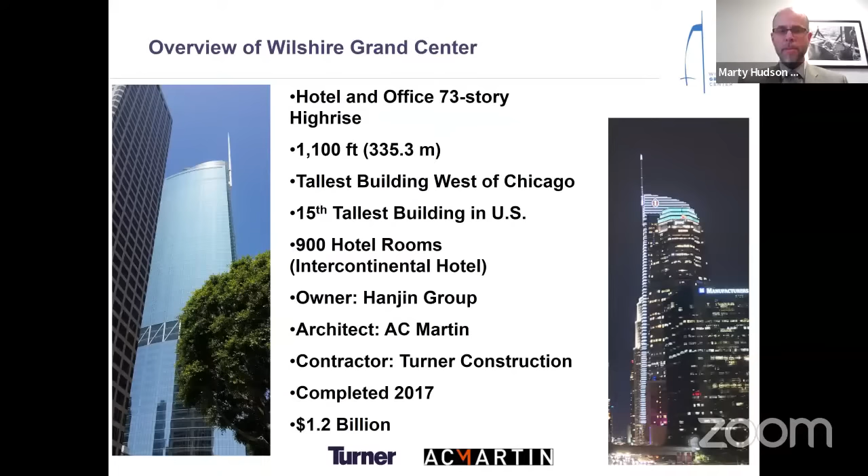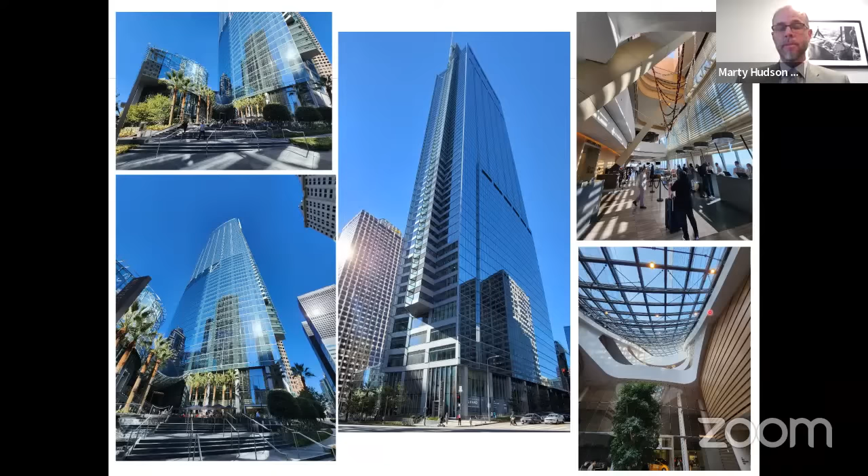The top right shows the lobby of the hotel. So this is a sky lobby on the 70th floor. So that's the only sky lobby of a hotel in Los Angeles. And so that allows guests to really take in the views before they even check in and then go back down to their hotel room. There's a beautiful curved skylight area between the main tower and the low rise. And so there are a lot of beautiful architectural features that A.C. Martin put into it.

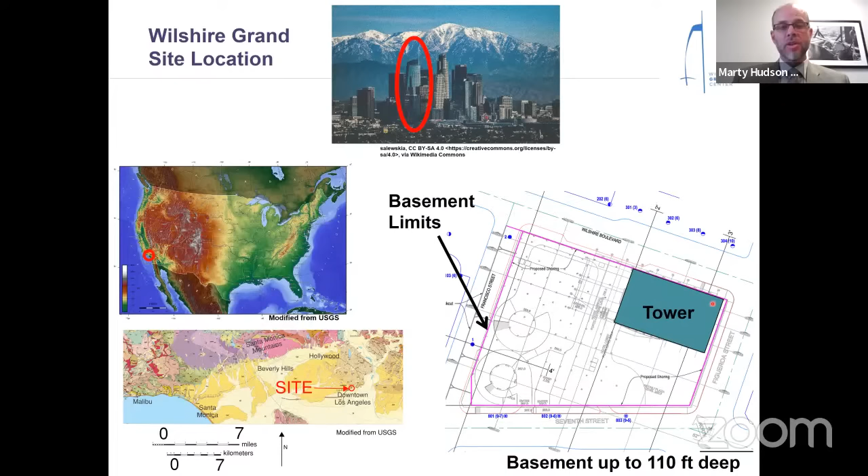Here's a plot plan of the site, and you can see the streets surrounding it: Wilshire Boulevard, Figueroa Street, 7th Street, and Francisco Street. And in purple is the outline of the basement. It takes up nearly 100% of the site limits. And the basement is up to 110 feet deep. It is actually variable because the topography is sloping as we come up out of the alluvial plain into the hills there. So it's shallower in some portions, the excavation, and deeper in some portions.

So as a first step, when the geotechnical investigation was being performed, we had to drill borings at the site. And with the large hotel structure that was previously there, we had the challenge of knocking holes in the structure, getting drill rigs down into the basement, and drilling with limited access equipment. If you do geotechnical engineering, that's a big deal to sometimes get on sites like this. And so we started getting the data out of it.

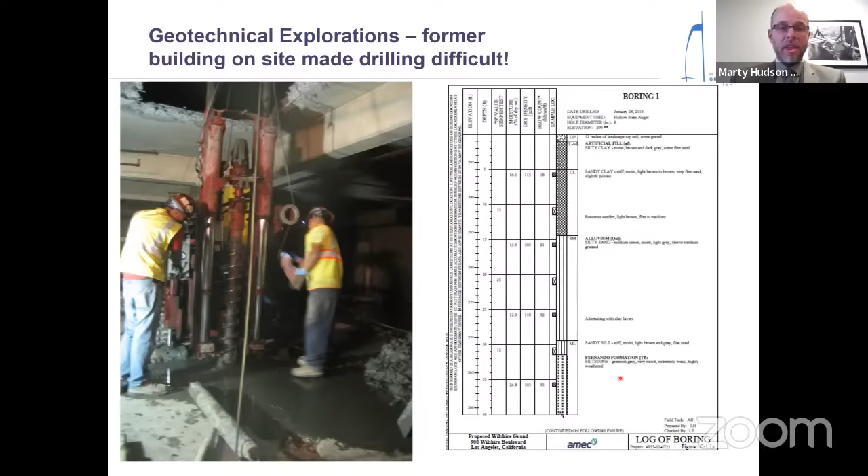On the right, you see there's an artificial fill over alluvium, and then you begin to get into the rock, which is called the Fernando Formation. Here's another boring where the rock is shallower, just a little bit of fill, but by 3 feet, you get down to the rock, the Fernando Formation.

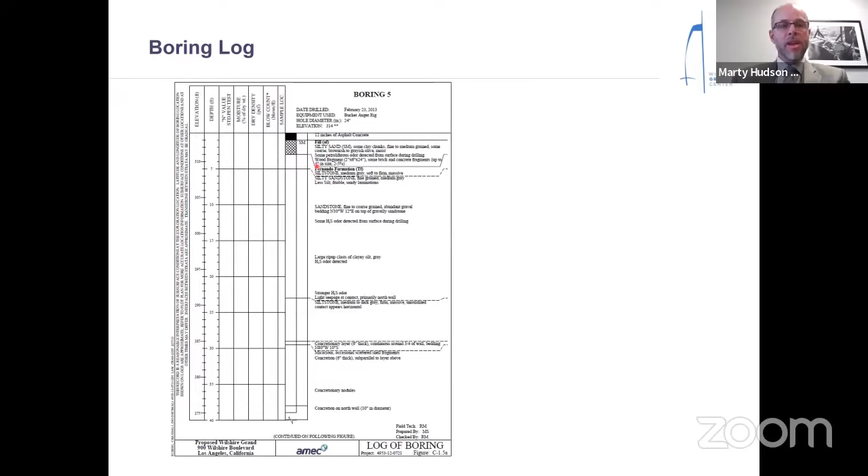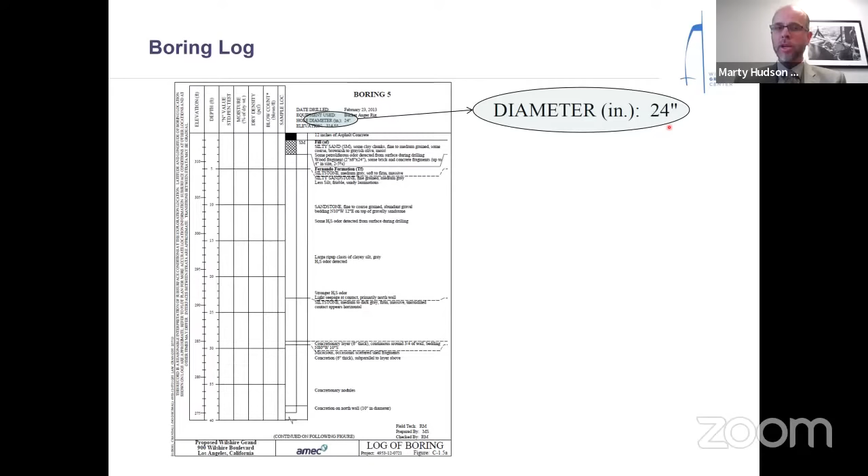Now, there's one thing unusual I'd like you to note about this boring log, and that is the diameter of the boring. That's not a mistake. It's 24-inch diameter boring. Now, why would we drill such a large diameter test boring? The reason is because we wanted to backfill the hole with geologists, as we say in the geotechnical engineering world. That is, we wanted to send a geologist down the hole.

Now, why do you do this? It's because the Fernando Formation comprises siltstone and sandstone, but there are bedding planes. So going down in person to look at them, you can see where bedding planes are, what the attitudes of the bedding plane are, the dip, and you can see the strength and even dig samples out from the side walls of the boring.

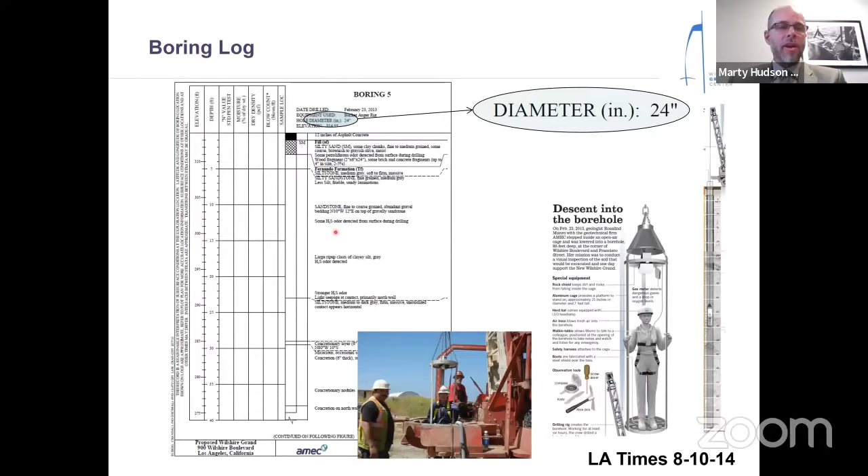So that became very important because if you have adverse bedding, it can cause instability problems with your excavation. So this is not commonly done in a lot of the world, but historically has been done in Los Angeles to some degree. Obviously, you can't do it if there's high groundwater or if there are hazards such as methane gas.

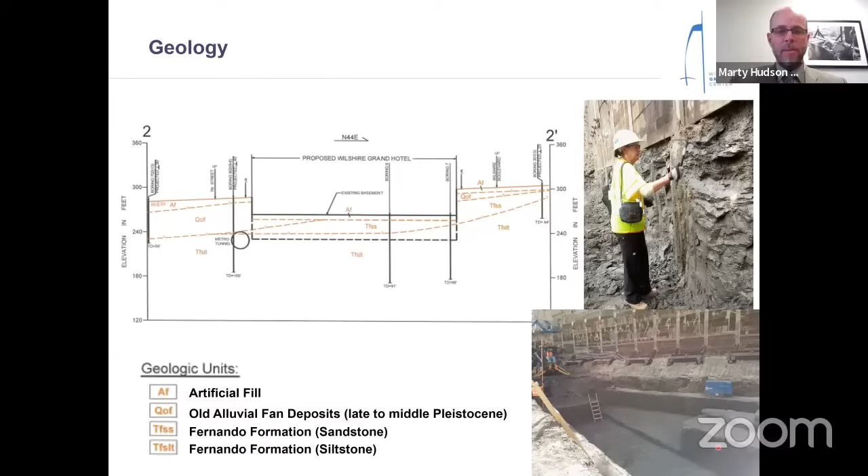Now, I like to say that the Fernando Formation is a wonderful material for a high-rise building because it's soft enough to be able to relatively easily dig through, and yet firm enough to provide fantastic foundation support for the structure. So here's another picture of Rosalind as the excavation was occurring, and you can see the makeup of that siltstone material there. It also is fantastic for digging out the foundations because you could make neat cuts of the large spread footings or other foundation elements. So you see how well the siltstone retains its shape there.

However, we did have one surprise on the project, and that is that we got to the middle of the site, partway down, and I got a call one day that said, we've hit some concrete. Now, I knew that we were already well into the Fernando Formation, but they said, no, somebody buried concrete. Well, that's a little bit difficult to do below the natural grade, but I came out and took a look, and sure enough, it looked like concrete. You could see aggregate and the cement binding the aggregate together, but it's not man-made concrete. It's a naturally occurring concretion.

Now, you occasionally get concretions in the Fernando Formation, but at the center of the site was a blob the size of a small house. Now, we hadn't observed it in any of the borings, just had not happened to see it, nor in the shoring around the perimeter of the site. It was exactly at the middle of the site, and the bottom of this blob of concretion was above the bottom of excavation. So we are very fortunate in that sense. It didn't interfere with things.

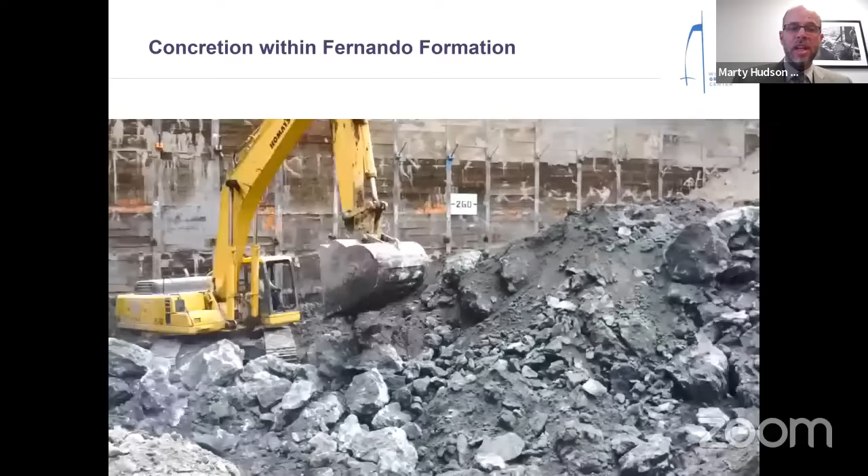But here's the video. This illustrates that to get through the concretion, you had to jackhammer the material basically to break it up. And you can see the large chunks of this concretionary material that had to be removed. So this is not how the rest of the site was excavated, fortunately, but in this area, that's exactly what we had to deal with.

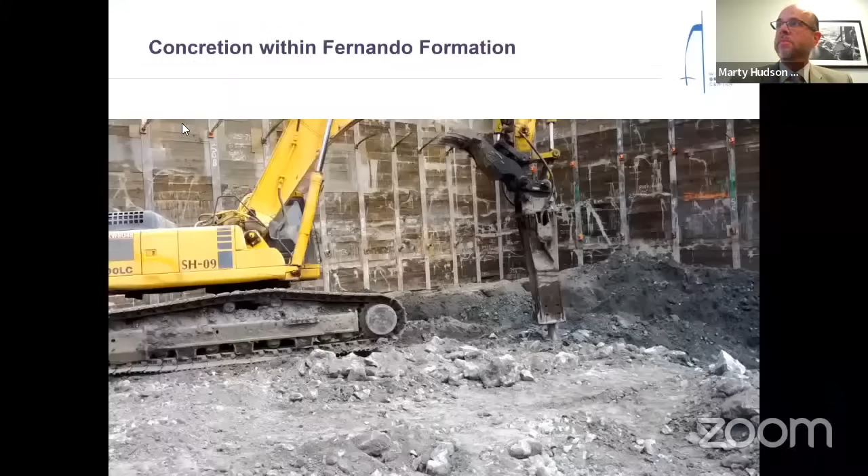All right, so now we get on to the design of the project. So for the design, we had to perform seismic analysis. Brandow and Johnston was the structural engineer of record, and they partnered with Thornton Tomasetti for the seismic design of the structure. And for this, they followed the guidelines of the Los Angeles Tall Building Structural Design Council.

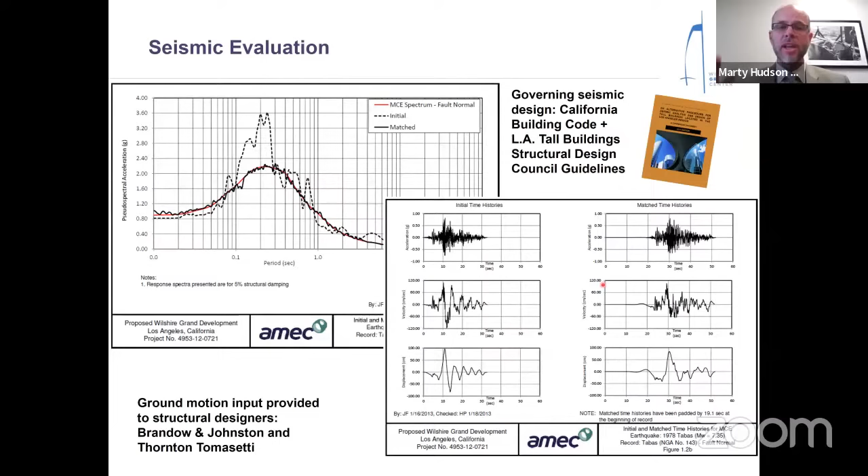So for that, first site-specific response spectra were developed, and then time series were developed. So there was a suite of time series that were put into the structural model. So that's how the design and analysis was done from a geotechnical perspective.

Now I'll move on to the shoring design. So for the shoring design, here's an example at about the deepest excavation. This is a photograph taken when the excavation had been completed. So right at the middle, this is about at 110-foot depth. And for the shoring, soldier piles were used with timber lagging boards in between the soldier piles.

And then in cross section, you see that the soldier piles were laterally restrained with tieback anchors. So the tieback anchors were drilled under the adjacent street with permission from the city of Los Angeles. And so as the excavation progressed, the tieback anchors were drilled and locked off at the design load. So that's how the shoring was accomplished for the most part.

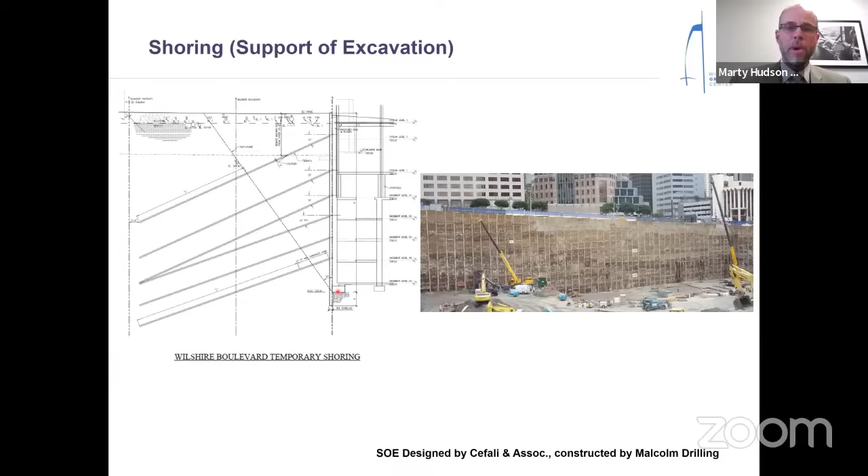However, on one of the sides, the street was very narrow on Francisco Street. And in fact, across that narrow street was another high-rise with a basement. So you were restrained laterally in how wide the tiebacks could go into the ground. That made it difficult to support the entire soil mass.

In this case, the solution that was obtained was to remove a portion of the retained soil. Now, this is not something that we usually do, to remove a portion of the street, but by removing that wedge, it reduced the weight of the retained soil enough that we got a sufficient factor of safety.

So fortunately, the city of Los Angeles agreed to temporarily excavating half of the street so the excavation could be made and vehicle traffic could still go on the other half of the street. So the city of Los Angeles did give permission for that.

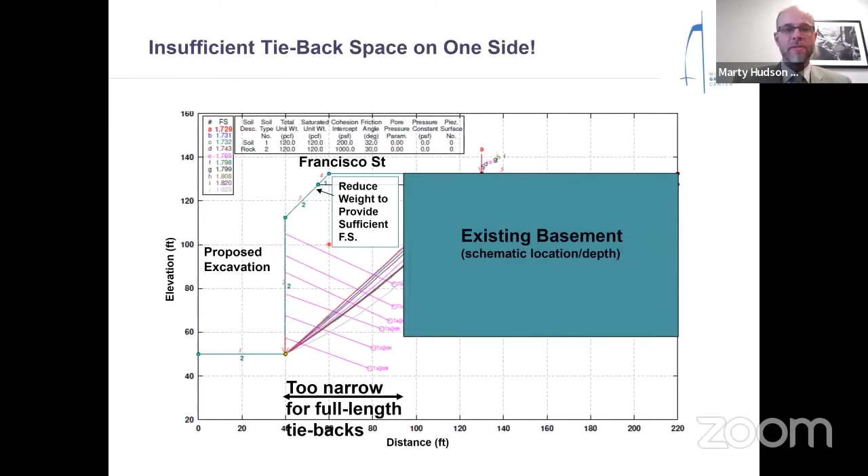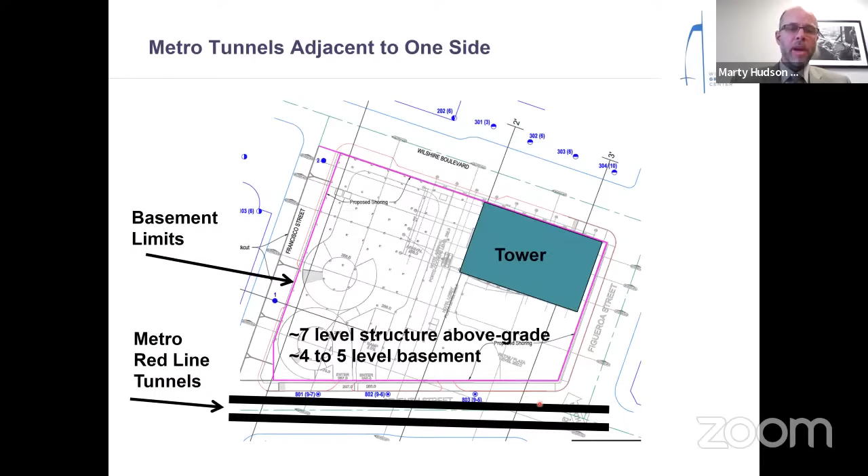On the other side of the site, we had another problem, which is the Metro Red Line, now called the B and D line. They have their tunnels under the street. Now, those tunnels were in operation during the entire construction. So here's another view as excavation had occurred to show you where the tunnels were under the adjacent street.

And then in cross section, you can see how close the closer tunnel was to the basement excavation. In fact, it was as close as roughly 5 to 7 feet away from the proposed new basement wall. So that's very close to it. So then the question is, how do you retain the excavation on that side?

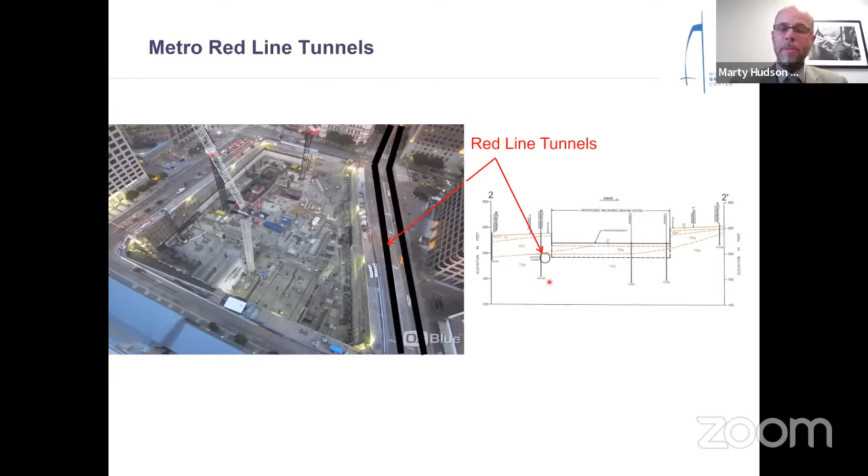Now, as with a lot of developments, we had to retain every inch of basement excavation, so you couldn't simply reduce the width of the basement on that side. Rather, we had to retain it. So here's a cross section of the solution that was obtained. Now, this support of excavation system was designed by Cefali and Associates, and then it was constructed by Malcolm Drilling.

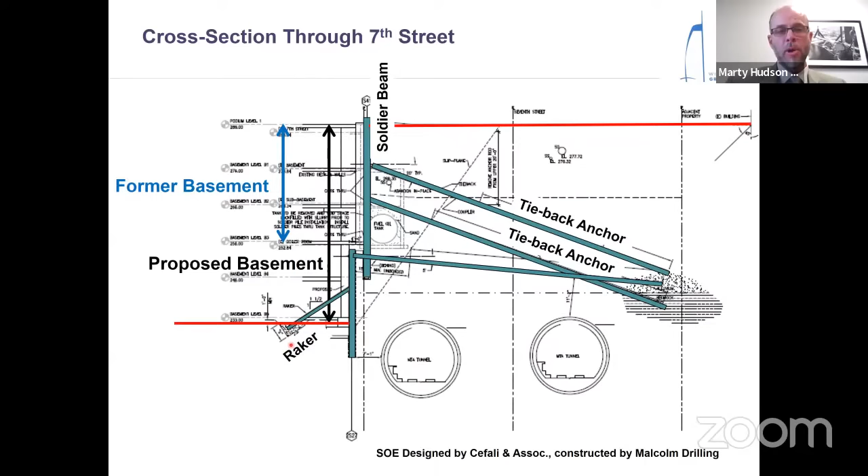So that's the design. And here's a photograph of what it looked like after it was implemented. You see with this dashed line, that's the break between the upper outboard soldier piles and inboard soldier piles with its tieback anchor heads that you can see there.

And then here's the rakers and the raker footing. And then here's another problem with rakers is that you need to be able to construct the basement wall. So here you have one raker for every 2 soldier beams, which required a waler beam to transfer the raker load into the soldier piles. But the waler had to be offset away from the soldier pile with these standoffs. And the standoffs then could allow for the basement wall to be constructed behind the walers.

So that's a lot of steel and a lot of detail work in order to construct that. So as you can imagine, first the waler, rakers, raker footings are constructed, and the soil was left right below that raker level. Then once all of that is in and preloaded, then the final excavation of that wedge of soil could be made. So there's just a lot of complexity to that, and it's a lot of detail work.

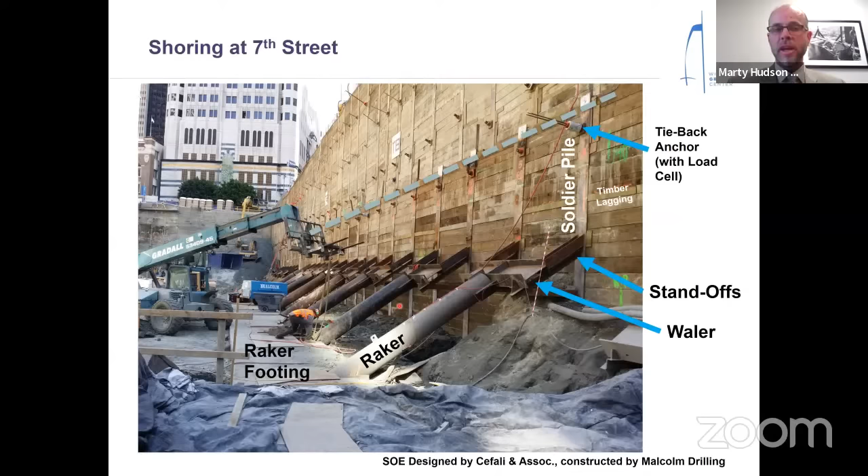Now that's the design and the construction, but Metro, rightly so, wanted to assure that the tunnel would not be damaged and that there would be no disruption to subway service during construction. So before this was constructed, we had to analyze and prove that the tunnel would perform acceptably, and then monitor the tunnel. So that required a large team. This is the team just with the task of evaluating and approving the shoring next to the subway tunnel.

On the left side are AMEC, the geotechnical consultant, and all of their sub-consultants on the evaluation and instrumentation side to make this work, including Jacobs Associates, which is now McMillan Jacobs, JL Patterson, Soldata for monitoring, Digitexx for vibration monitoring, and Comet Electric for installation of wiring and data transmission out of the tunnel.

Then on the ownership side was Martin Project Management and then Turner Construction for tunnel entry and coordinating installation. Under Turner was Cefali and Associates and Psomas, and then the structural designer. Then Metro for the review and approval of all of this, including Matthew Crow, Sam Mayman, John Jaramillo, and Parsons Brinckerhoff was hired, which is now part of WSP, to review that the analysis and design of the shoring was adequate.

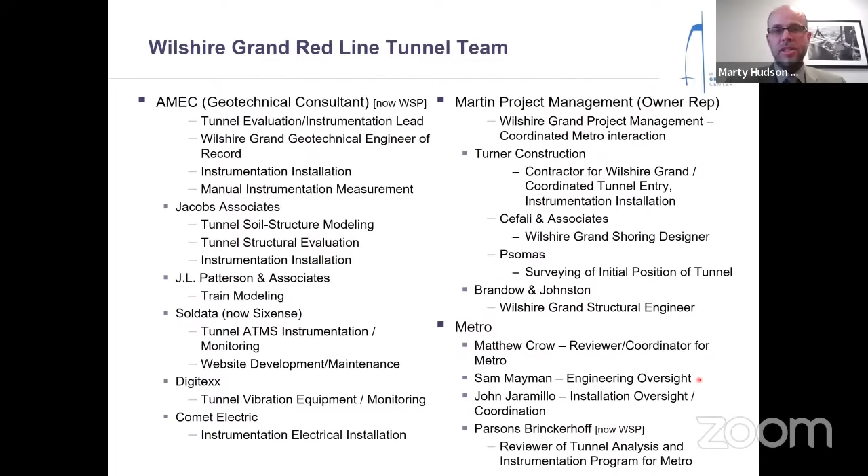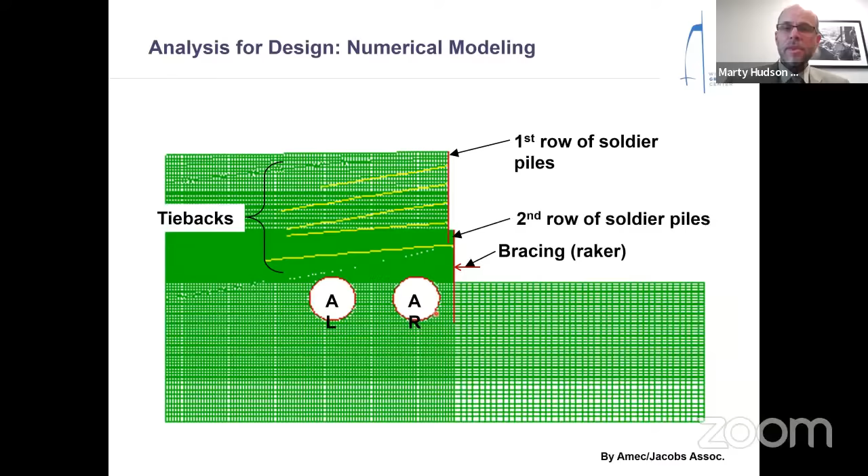So the first step was to look at the existing condition of the tunnel with photographic surveys all along the tunnel. Then next was the finite element evaluation of the staged shoring and excavation to see how deformations occur and how stresses change within the tunnel liner and how that would affect the tunnel itself. Now, along with that, a careful analysis of the tunnel liner and the concrete and steel within the tunnel liner, that was done by Jacobs Associates.

And what you have to understand after this analysis is we found that the tunnel would move up and toward the excavation. Now you might think, why would the tunnel move up? The reason is because with that large volume of earth being excavated, that causes a heave of the entire excavation. And that heave doesn't end just right at the shoring. The heave continues on beyond the project because the Boussinesq bulb continues well past the limits of the project. So that causes an uplift in all of the ground and therefore a tunnel heave.

And if you think about the tunnel, then that means we're creating a new hill within the tunnel so that now after the excavation, the trains would go up over a small hill that didn't exist before because of the heave from the excavation. So with that type of deformation upward, plus the lateral deformation due to the shoring itself, we had to say, with the tracks moving up and over,

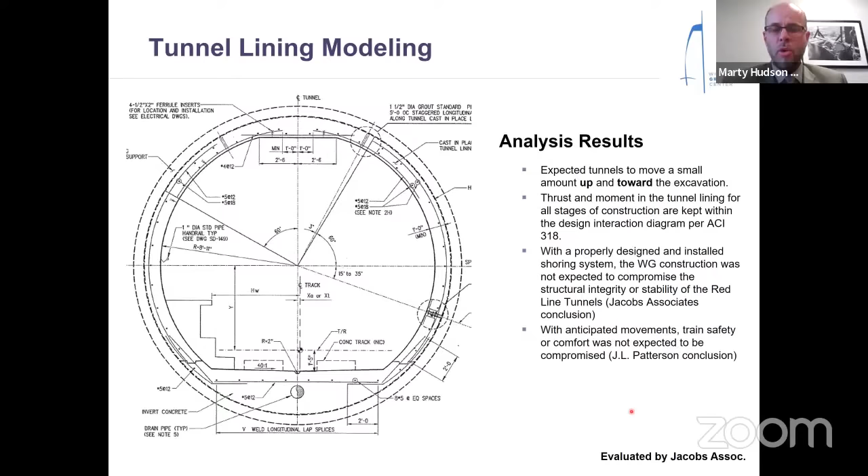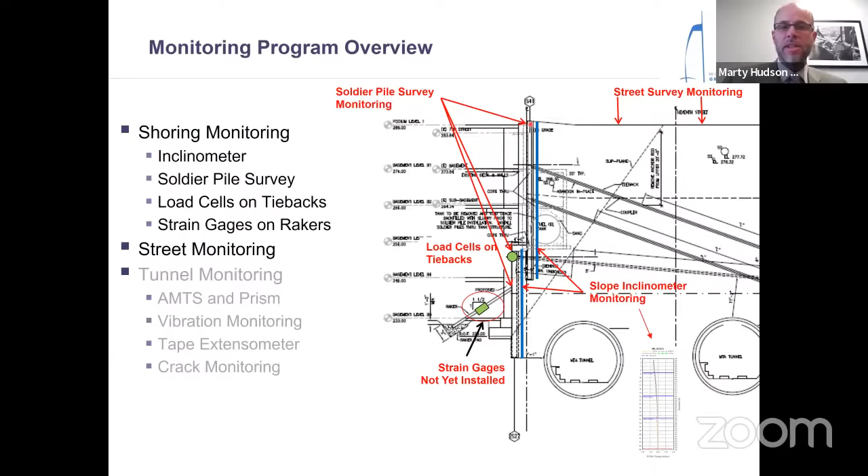So now, once the analysis showed that things would perform acceptably, then it's time to monitor, because the monitoring program is more important than any analysis, because you have to check to see, is it performing as we expect it to? So there were two main portions. That is monitoring that occurs outside the tunnels, that is on the shoring itself and on the street. So on the shoring itself it consisted of slope inclinometers, tieback anchor load cells, raker strain gauges, and then street survey monitoring and soldier pile monitoring. So that's exterior to the tunnel.

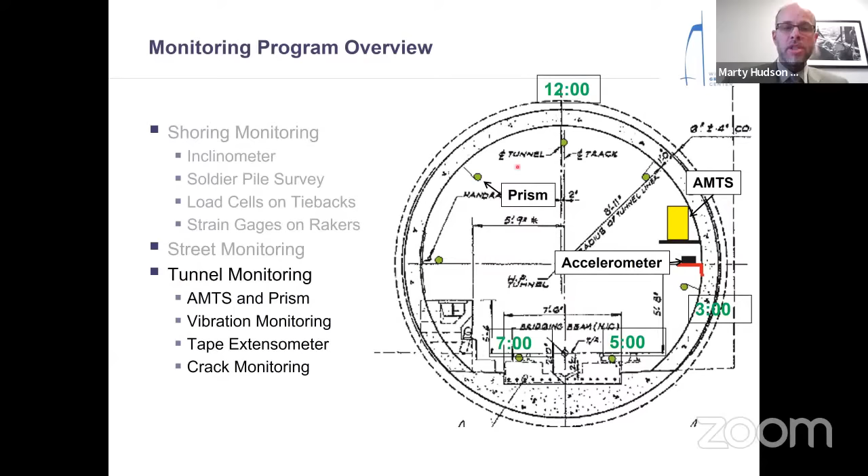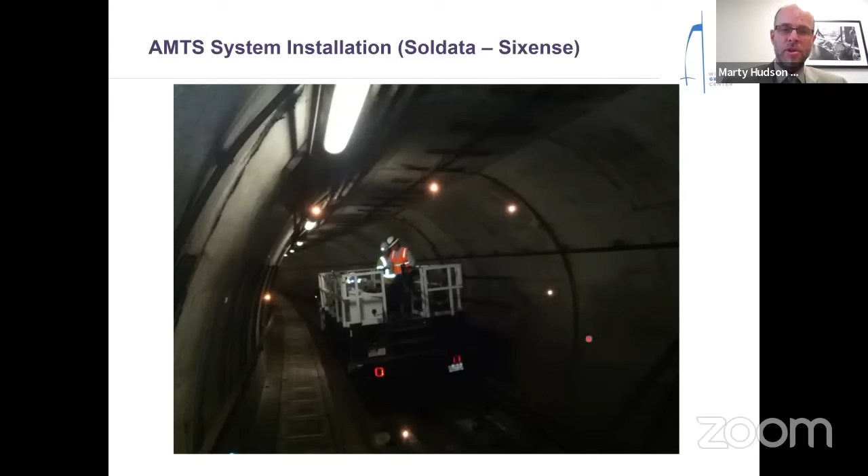And then finally, interior to the tunnel, using automated total stations, accelerometers to check vibration impacts on the tunnel, and then installing prisms all around the interior of the tunnel that the automated total station would shoot to. So here's a picture during our installation. We could only do this at, say, 2 in the morning when the trains weren't running, and then drilling into the side of the lining and installing brackets and reflectors. So from this photograph, you can see the flash from my camera on the reflectors around the perimeter of the tunnel that were just installed.

And then here's the completed installation. Here's the automated total station, and then the conduits we had to install to get the data out and the power into the automated total station. And then the mounting of the reflectors all around the tunnel. Now, again, this isn't something I normally thought I would be drilling into the lining of a tunnel as a geotechnical engineer. But hey, it was fun, and Metro wanted us to do that. So sure, I'll get up at 2 in the morning and install reflectors if that's part of the project.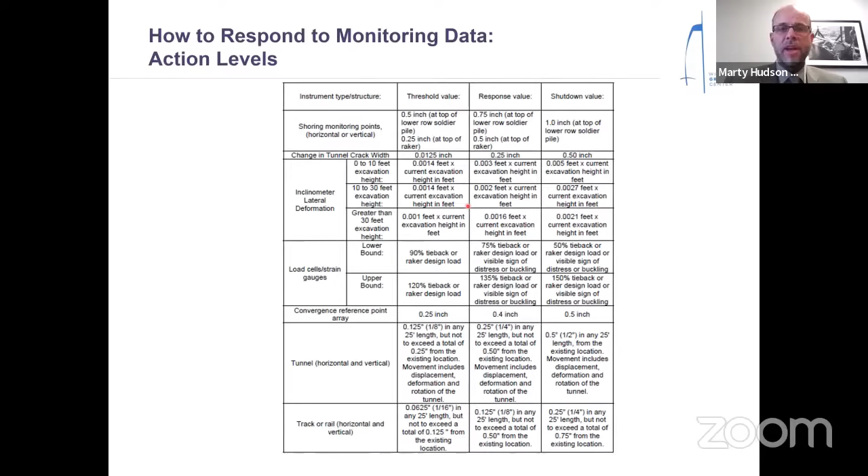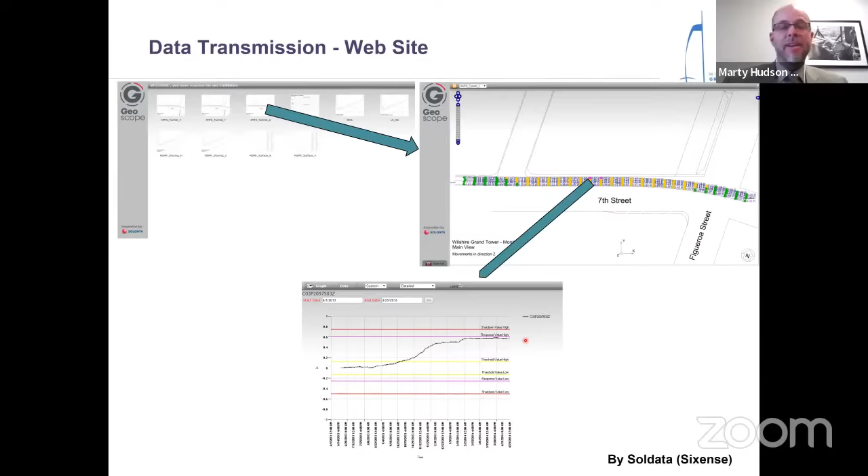So here's a sample of the monitoring website that Soldata put together, taking data from all of these different sources, including manual surveying. And then we could see, so here's a graph. In this particular case, you see in the tunnel, as the tunnel is rising while excavation occurs, and you could see that it got to our anticipated level, which we called the response level, and stayed just below that. So that was exciting and fun, but it was very satisfying to see that the predictions worked very well.

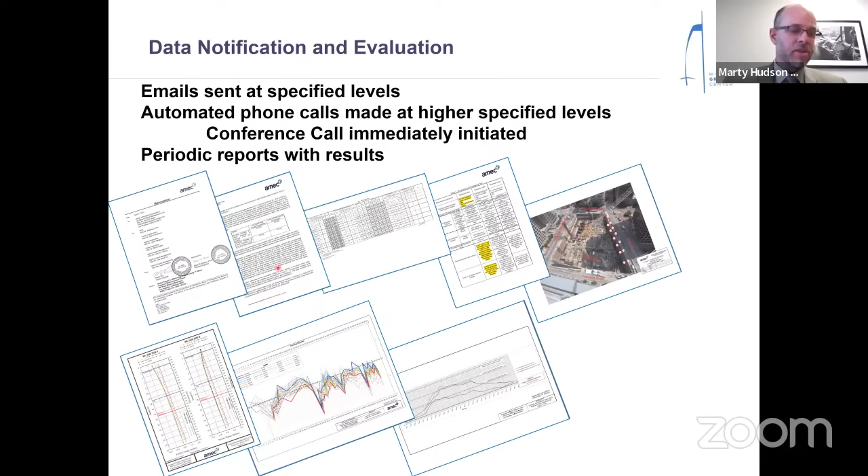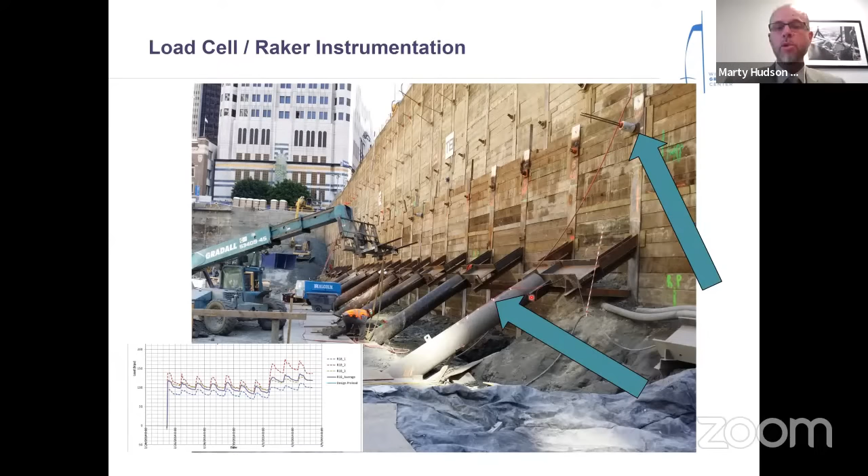Then periodically, we put together detailed monitoring reports that showed how everything was responding and our evaluation of that. You want some kind of a summary with a one-page piece of text that everyone can look at and understand. So some of the data was very interesting, such as the rakers. The rakers every day had higher then lower stress. You had to separate out that daily fluctuation from long-term trends. Now, why did you have daily fluctuations? It's when the sun would hit the steel, causing expansion and higher stress on the shoring. So that causes continuous small movements in the shoring due to the sun hitting the rakers.

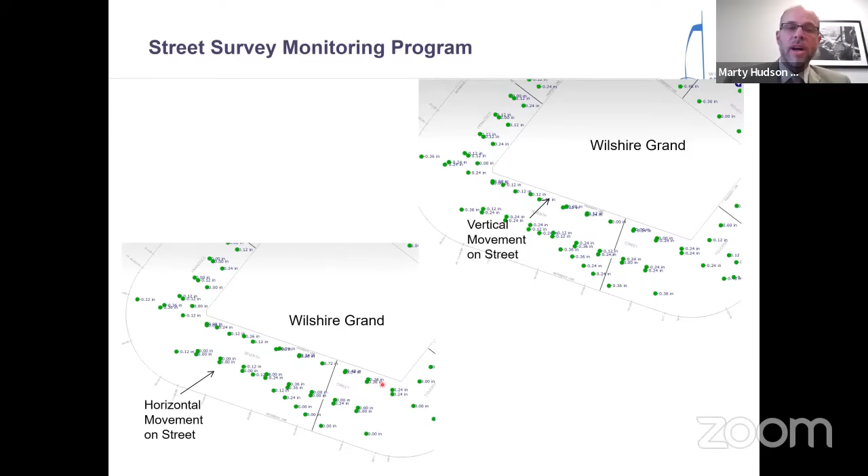Here's data on the streets, and yes, we saw the street rise on the ground surface away from the excavation. Then it dropped a little bit right next to the excavation due to the shoring movement, and then lateral movement outboard from the street toward the excavation as one got right next to it. You can see the movement, the street coming up, and then it settled down.

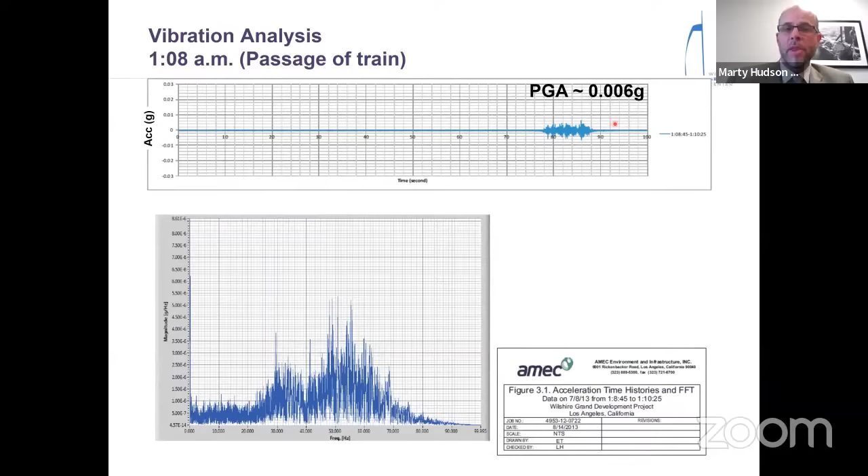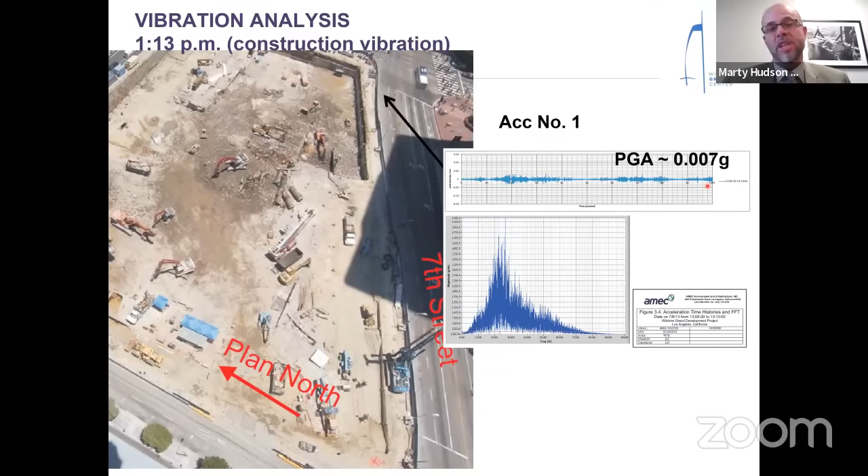Now, vibration monitoring worked very well. You could see the vibration whenever a train went by. This was an acceleration from the train on the tunnel lining of 0.006 G. So during soldier pile installation, how much vibration? Well, that's 0.007 G. So almost identical to train passage vibration. And we could see then other vibration from train passage.

Then we were fortunate enough to have an earthquake because this is Los Angeles. And I can say it would be very fortunate for us all if during Geo-Congress we had a nice earthquake, not enough to cause death, but to be interesting for everyone there in Los Angeles. But I can't promise an earthquake, we can only hope.

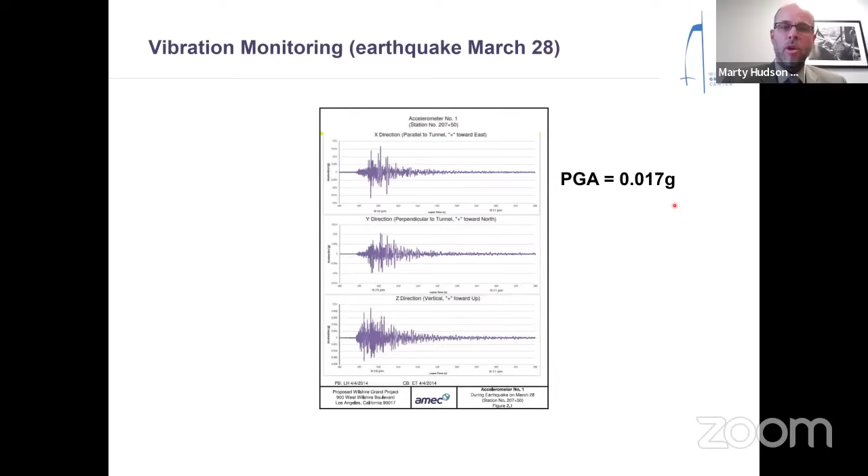But in any event, during the excavation, we had an earthquake and it had 0.017 G. So that was about double the acceleration that we saw from construction or train passage. So none of that caused any damage.

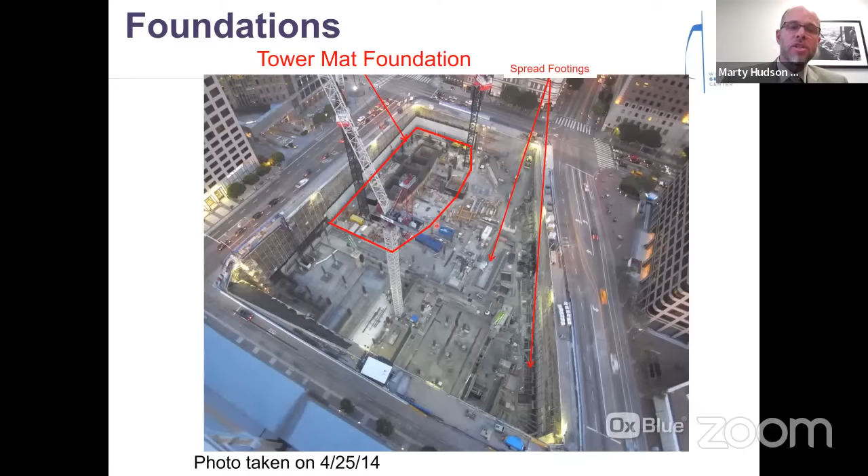Hey, let's talk briefly about the foundations. The main tower was supported on a mat foundation bearing directly on the siltstone. Then the low-rise portion was on spread footings. So you can see the mat foundation is only a portion of the site. So how was that evaluated? Well, you can imagine with a standard mat foundation, if you have a concentric load, we can evaluate that fairly well. But here's a complexity to add.

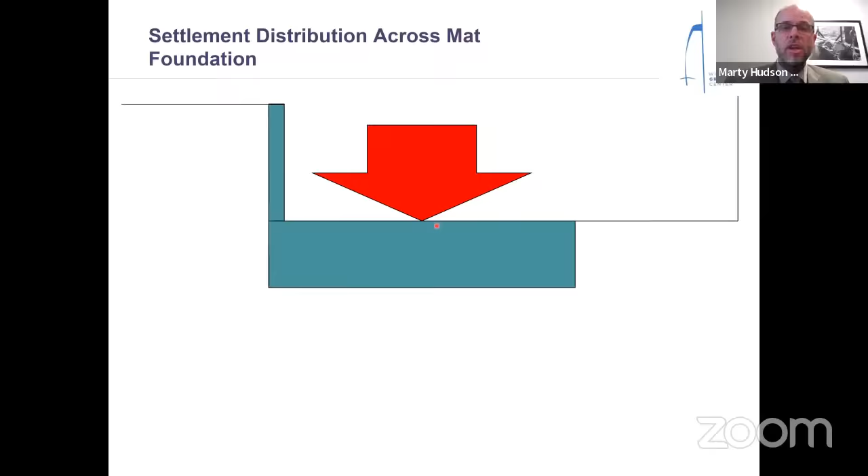You had a very stiff basement wall on one side of the foundation that effectively stiffens and prevents curvature of the mat on one side. And then in addition, you have excavation on one side of the mat, but not the other. So all of those factors, soil structure interaction, interplay. So the reasonable approach in this case was to perform a 3D finite element soil structural evaluation.

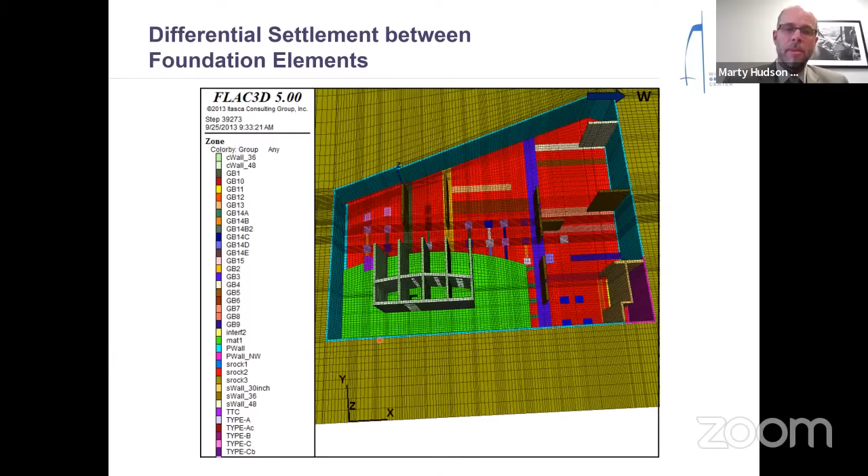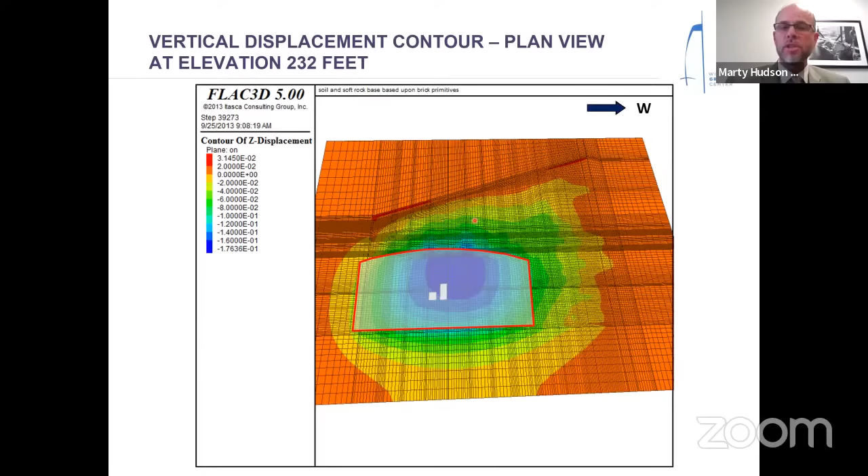So this is the model that we built, including the mat foundation, the excavation, the basement walls, and the shear walls at the core of the building. So how did those all interplay? We then finally got the settlement contours to find out what the settlement would be. And you can see it's off center because of the wall stiffening one side and the excavation being on the other side. So from this, we could evaluate the differential settlement between the mat and the footings and between footings.

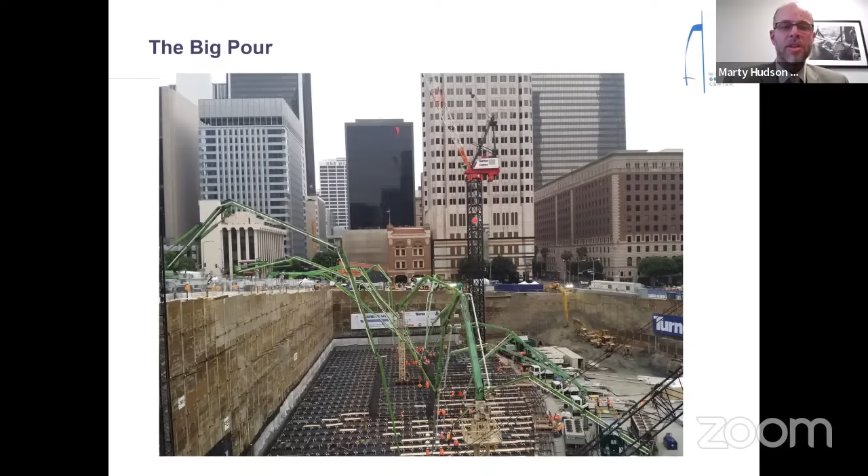So at the end of the day, there's the big pour, and it was made as a single continuous pour of concrete over a weekend. And at that time, it was the largest continuous placement of concrete in human history. So I got to meet the Guinness Book of World Records person who came out to document this event. And so it was a big deal when that occurred.

So there's the placement of the concrete over the 3 days. And you can see there's little white features here. And then there's white boxes you can see at the edge. Those are a big cooling plant because the heat of hydration of the concrete was so great that we had to cool the mat for weeks afterwards to prevent the temperature from becoming excessive in the concrete mat. So that's something you have to think about when you have very great thicknesses of concrete.

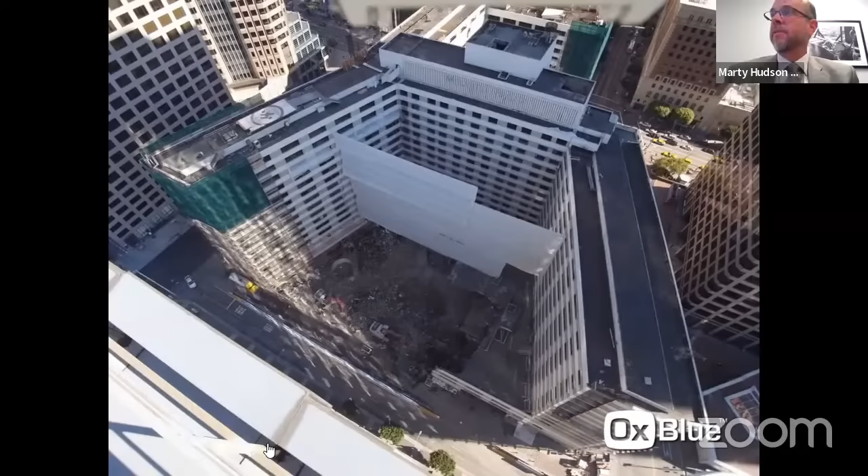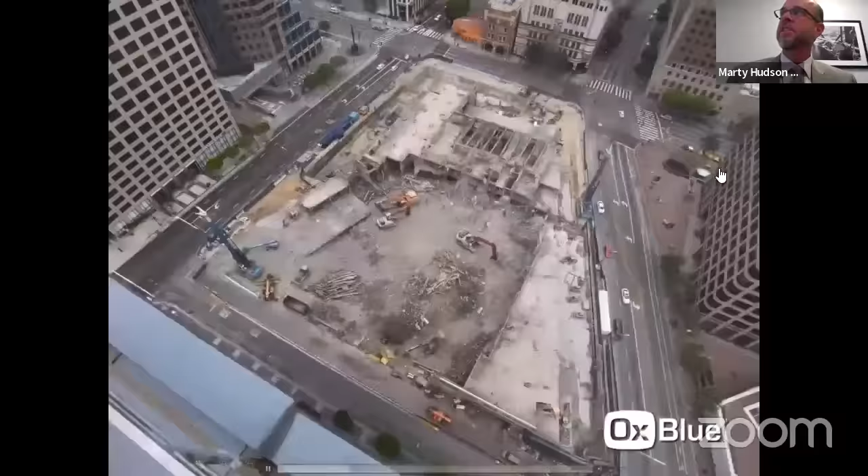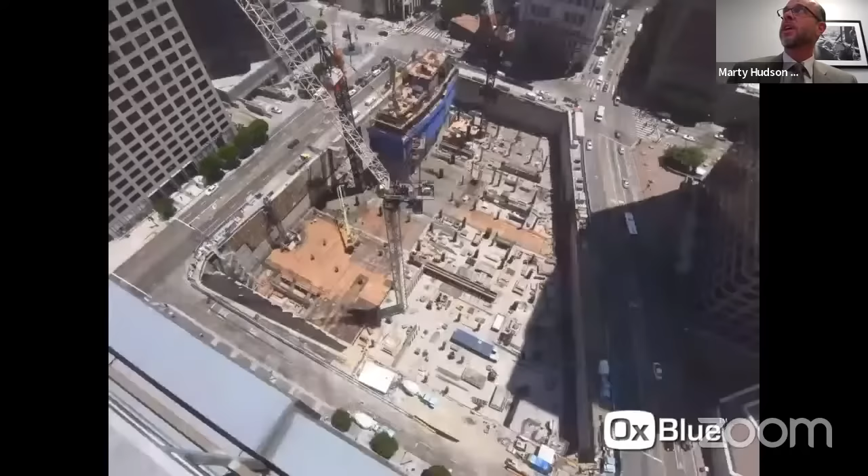So here's a video of the excavation and the beginning of placement of concrete. So that was the former building, carefully disassembled, excavated, and there's the excavation occurring down to the bottom. Then the mat foundation, the rebar being placed. There's the concrete. Then there goes the core of the tower. And so then the core was coming up from that. This was concrete first, and then steel came up second on the perimeter.

So with that, I conclude my talk, and let's see if we have time for any questions.